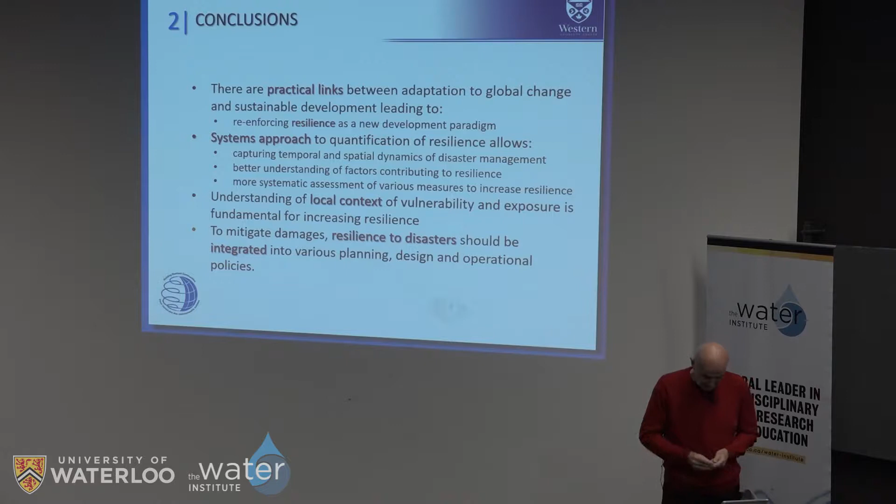I organized the presentation in the form of walking you from risk management to resilience, a little bit on quantification of the concept, and then through the example of a public tool that we have developed, I would present how this quantitative concept can be used in decision making.

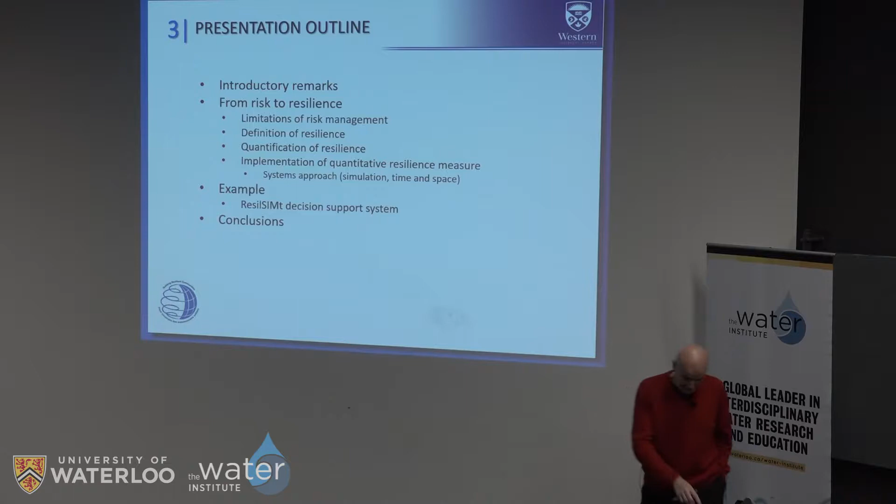I do have a lot to say about this particular tool and my multi-year attempt to involve the city of Toronto to work with us, and unfortunately, that's not an easy task.

To give you the context, these are the type of projects that I was involved with, within which we worked and utilized this or developed this quantification scheme, introduced this idea of resilience to various areas of potential application, and also worked with decision makers in developing tools that can be used by them.

I'm leading two projects, one a collaborative research project with BC Hydro, where this concept of resilience is being used to assess the safety of hydropower infrastructure, especially dams, and how this concept can help resolve the problem of having $63 billion in assets and approximately less than $10 billion over the next 10 years to maintain them, with assets about 50 to 60 years old. So you understand that the issues related to safety are very serious issues they have to deal with.

The second project I'm involved with is funded by the reinsurance company Chaucer. It's also a collaborative project, and they are very much interested in seeing how different types of natural disasters, with a focus on weather-caused disasters and earthquakes, can be incorporated into their business model, the way they offer products, how they structure the products, and how they determine what products should be done.

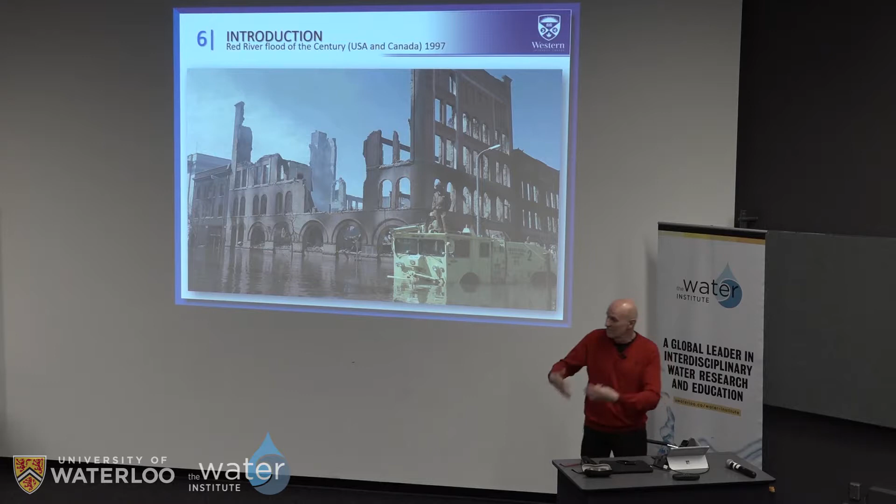For me, it was an illustration of how easy it is to teach students how to design a dike or how to operate a piece of flood protection infrastructure, but how to explain something like this, or how I felt when people were talking about losing everything, lifetime possessions in a single event that basically erased generations of family economic growth.

So that probably affected the rest of my professional life. I did a lot of work related to managing risk, dealing with issues and events like this very large flood in 1997. Risk management is already part of decision making, especially dealing with complex water resources problems like droughts or floods or response to extremes. But in this context, we relatively simplify the whole problem by looking at the hazard, the probability of hazard, coming up with the best way of estimating it, and then looking into consequences of various types, trying to combine them into some measure of risk.

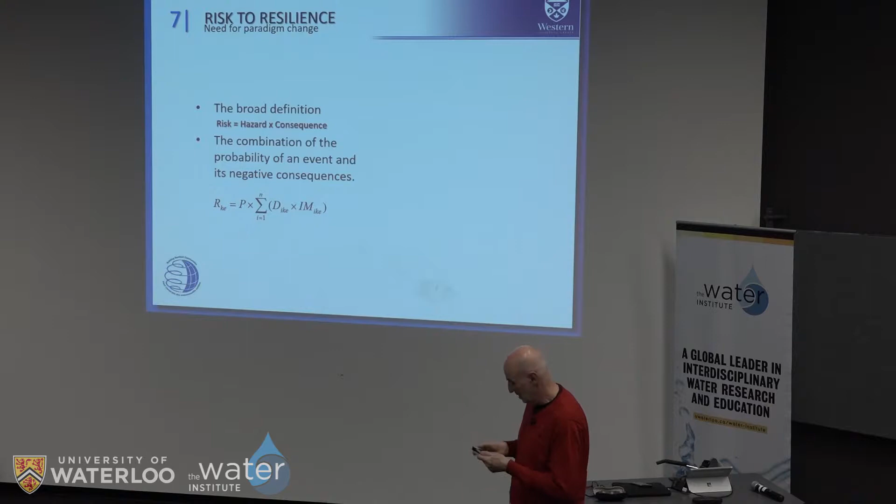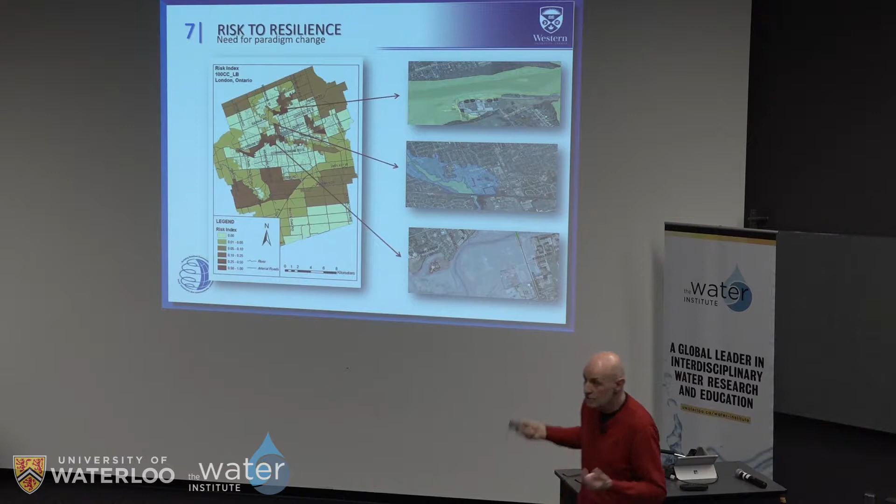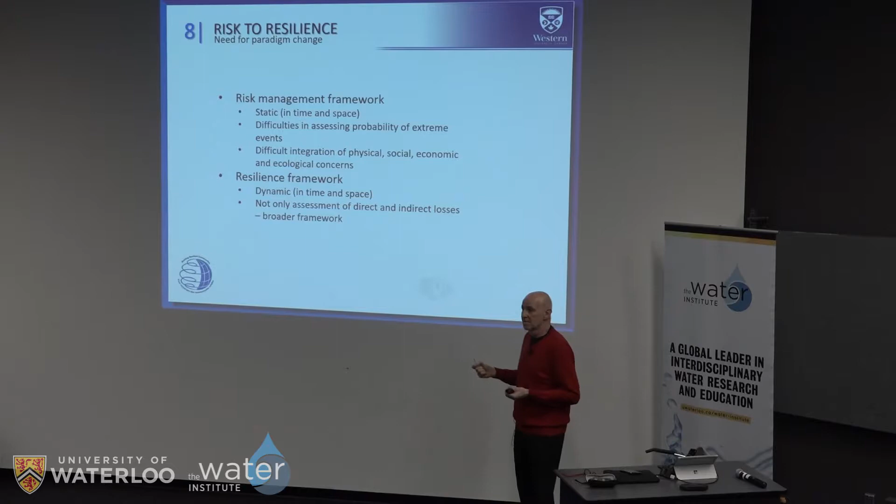So I'm trying to illustrate that even in this static form, a single number and a map with different shades of red, this kind of risk assessment tool was useful for decision makers. However, I feel there are still a lot of issues. First, this static nature and representation of risk as a single number. Also, difficulties in coming up with probabilities of extreme events when we are very much aware of how few observations of extreme events we actually have.

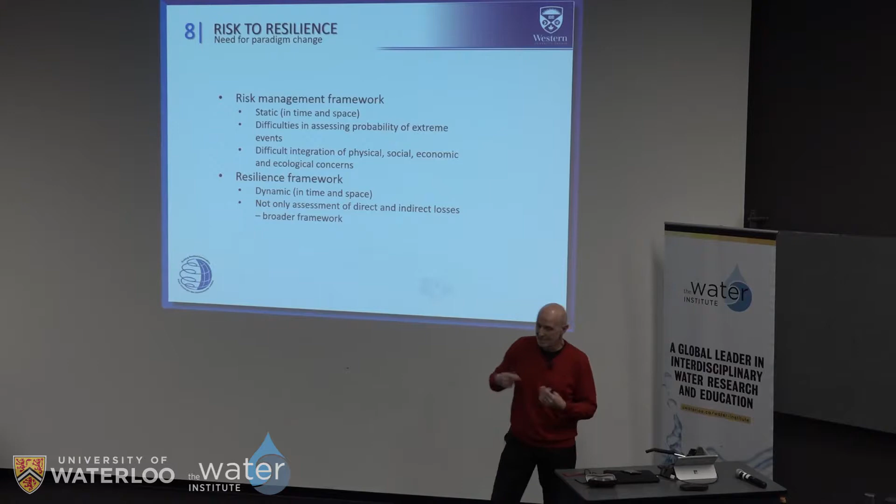Difficulties in integrating physical, social, economic, and ecological concerns together led to the whole switch, at least in my thinking and research, towards a measure of a different nature.

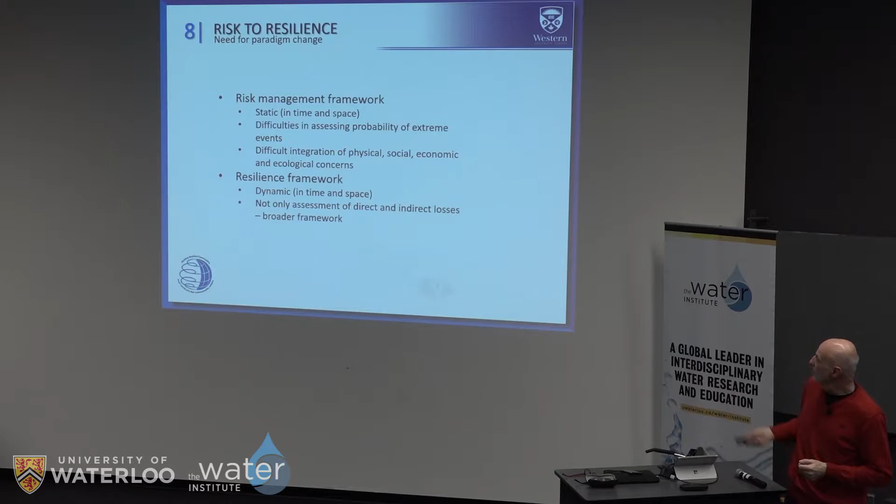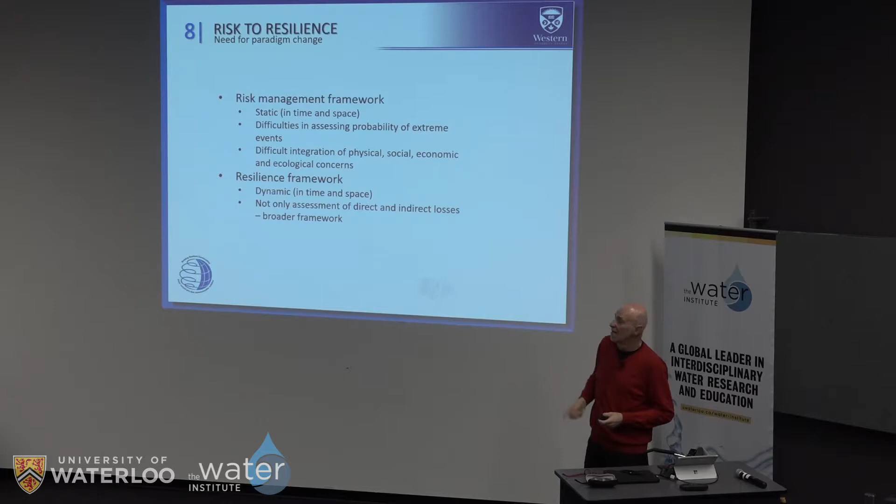That measure, at the beginning, needed to satisfy the need to be dynamic so we can capture the development and how the event goes from the beginning to the end and full recovery, and also the ability to deal with direct and indirect losses, basically building a broader framework that can be of multiple value to decision makers. So what we have done, we basically replaced the one shade of red in that previous map with a graph.

This graph is now a representation over time. The horizontal axis shows the time, and the vertical axis shows the impact, capturing the whole event.

Let's say we are measuring the number of kilometers of roads that are being inundated due to flooding within the urban environment. If this is the beginning of the flooding event, the roads will be inundated until we reach the maximum flow representing the maximum extent of damage, and after that, the system will slowly be recovering back.

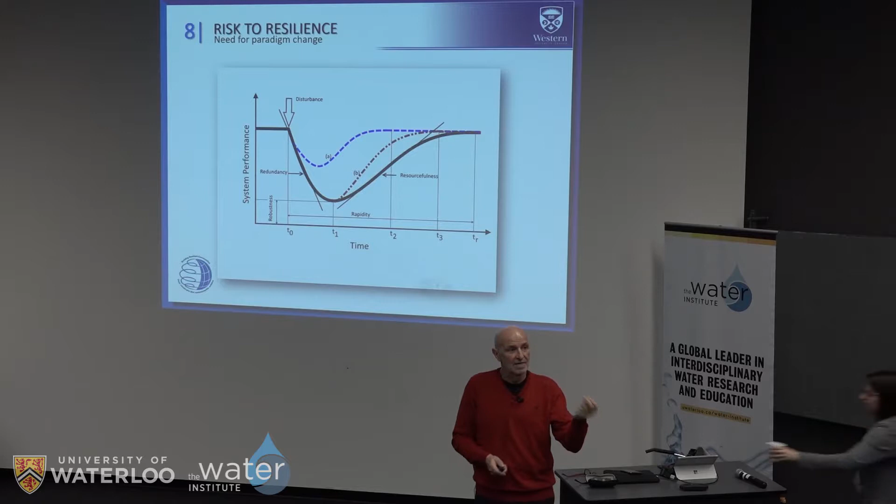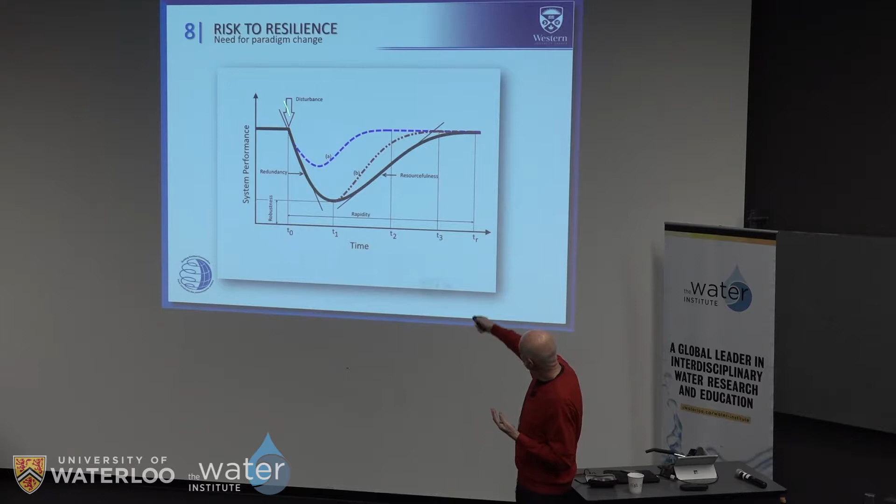So instead of having a single value of risk, now we have multiple sources of information. We are capturing the dynamics. We can see the slope of this curve, which is called the redundancy, that measures how fast you are losing the performance, how fast the roads are becoming

impassable or flooded. We have a measure of what is the maximum extent of that particular impact. We have a measure of how much time it will take for the system to recover. We also have the opportunity to see whether the system will be able to come back, or maybe simply end up with a level of performance below the initial performance.

Or if we put some resources, financial, human, mechanization, whatever, into this particular part of the event, we can actually change the slope, and we can maybe build the capacity of the system to a higher level than before.

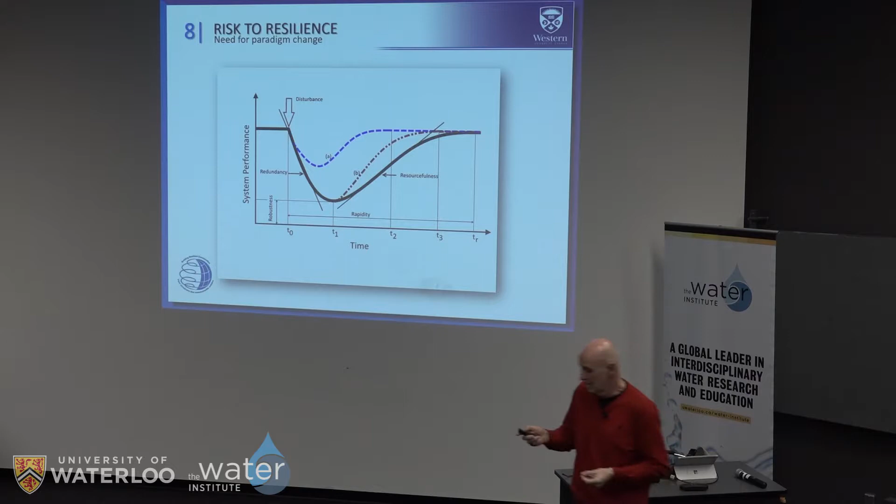So you see, we are replacing a single value, a single kind of risk, with now a full description of the system's response to change or changing conditions. And that's exactly what was used in the quantification.

I'm not going to go through the definitions. The origins of the terms are relatively old. Mechanical engineers are fully aware of, and civil engineers too, from mechanics, the work of Rankin. And then we had people in the ecological domain, followed by the hazard domain, where resilience started becoming a more and more popular term.

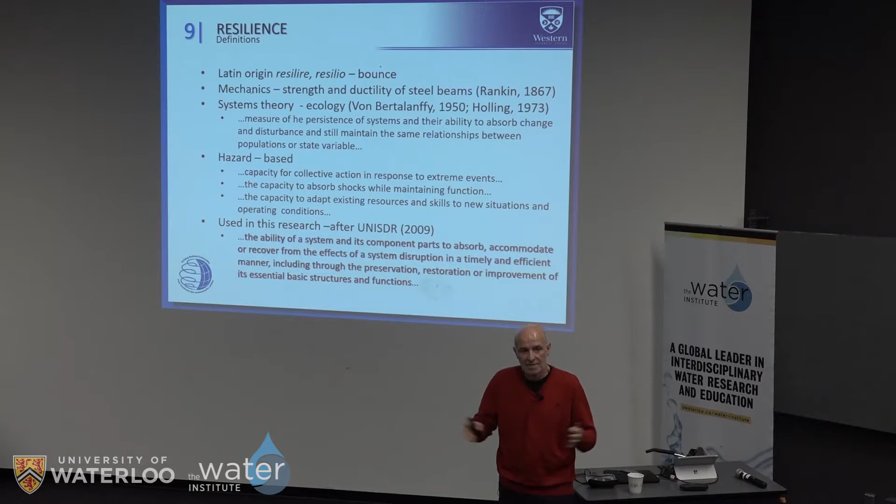At the end, what I'm using in this definition, and I think you're probably already sensing from the previous graph, I'm defining or expanding the definition of the United Nations disaster reduction, seeing resilience as the ability of the system to respond to change or changing conditions by mobilizing resources within a particular time frame and trying to return the functioning of the system back to its initial stage.

That type of definition and the graph I showed can be developed for multiple impacts. I gave the example of roads being inundated. We may show the performance curve using as a measure the number of beds in hospitals for people who may be injured during the disaster.

We may be using the number of, or the time of, disturbance to the information network or the communication network. So you can develop various impacts, link them to a particular hazard under consideration, all of them having different units and a similar shape of performance graph.

So now the logical question is, how can we convert that into a single measure? How can we put these different units together? The idea is relatively simple, and that's the idea we implemented in quantifying this.

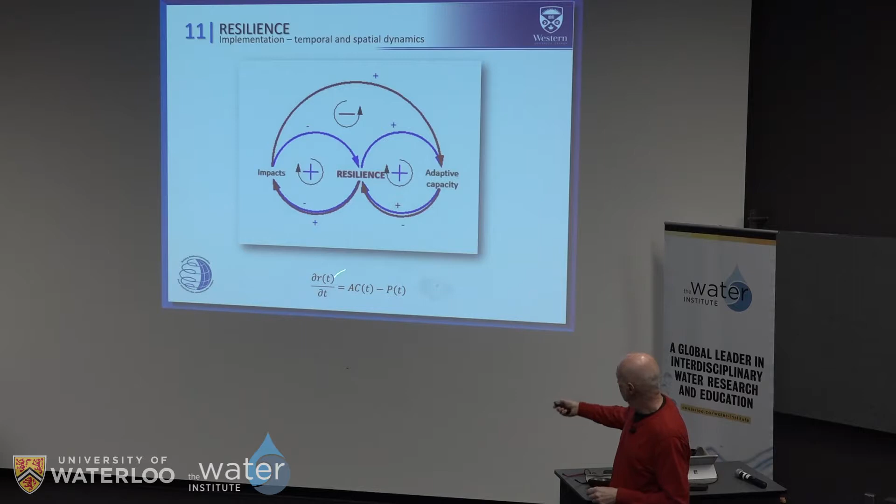That's implemented now in a systems simulation context with 3 feedback relationships linking impacts, resilience, and adaptive capacity, where 2 of them are destabilizing the system. These are the blue feedbacks, and the big red one is actually trying to push the system to a more stable state. In analytical form, adaptive capacity and the impacts together give us that measure of resilience.

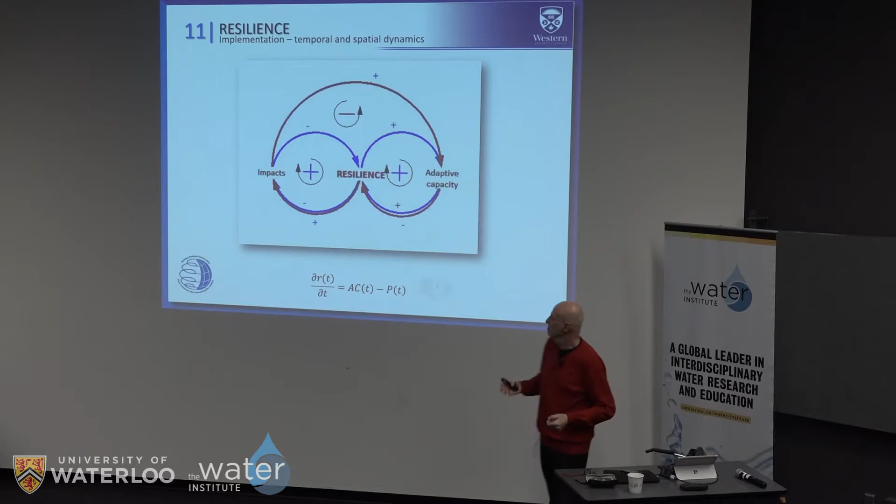So that's a short walk through the quantification process that allowed us to think about how to use this concept. We started very early with this project on coastal megacities, where each city was considered to be the system under consideration.

4 impacts were put together: physical, social, health, and environmental. We had a very interdisciplinary team. We worked with 2 doctors looking into health impact, 4 social scientists, 2 political scientists. I was even co-advising a thesis in political science, being an engineer.

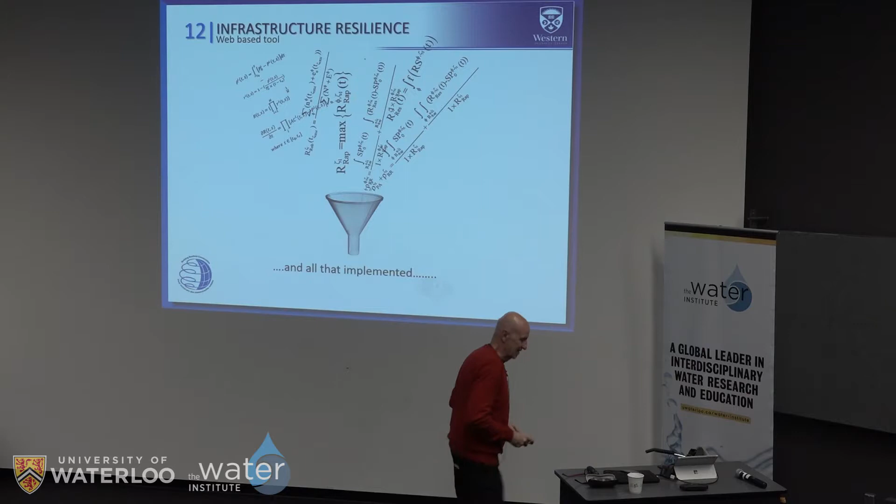That was really a challenge. But the point was that this concept did help us put these different perspectives together. It took us about a year to develop the understanding and vocabulary and agree, because economists were talking about the same things as we engineers but using completely different language. Our colleagues in social science were also talking about similar things but using another way of expressing their concerns. That prompted further motivation to try and build something that will help those who may want to implement this.

So the implementation that I'm covering in this presentation is available in the public domain in 2 forms. Here are the websites you can access easily to see what we have developed.

The first one is a prototype system that only deals with flood disasters, with 2 options, looking at Toronto and London, Ontario, and also seeing how, for example, different adaptation options can be investigated to respond to flooding in these 2 cities, utilizing this measure of resilience.

The second one I'm going to walk you through is much more detailed and much more general. We accepted the same idea of resilience, implemented in such a form that the user can identify the hazard, so it can go outside the domain of weather-caused hazards.

You can consider a terrorist attack. You can consider chemical spills. You can consider any possible hazard that may occur, and the same idea, in the same context and the same concept of resilience, can be used to investigate various response actions and adaptation measures.

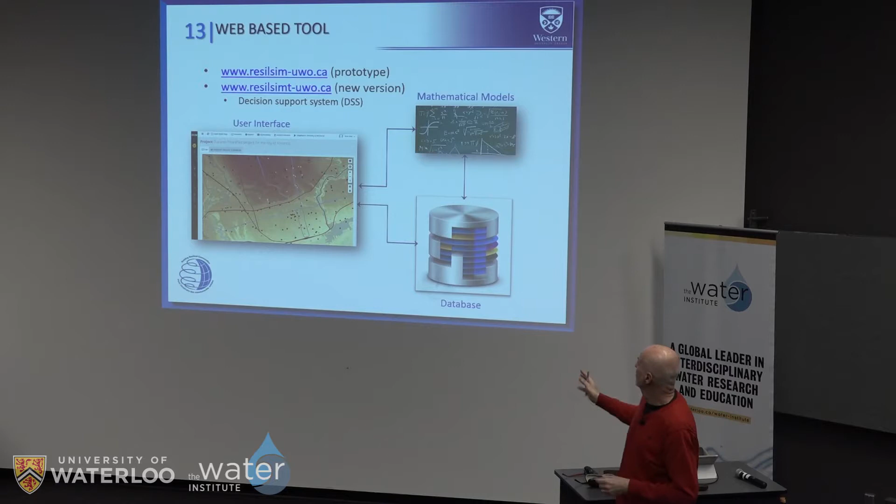Both systems are developed in the form of a decision support system, combining 3 key groups of tools: the graphical user interface, to assist users in preparing information, processing it, generating outputs, and extracting outputs in a form useful to them; a database, which is permanently updated with available information; and the so-called model base, where all the necessary calculations are stored, like the calculation of resilience as I presented it, as well as various impacts being considered.

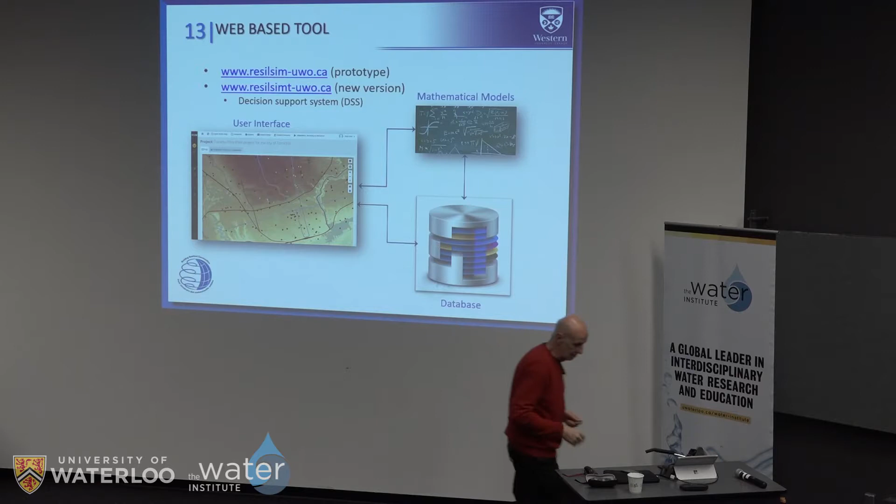This is the view—I'm just going to walk you through a few of the screens. A presentation of this nature doesn't allow me to go into a full demonstration, but I would strongly encourage you, if you have interest, to actually access this particular more detailed tool. Both tools have user manuals, also downloadable.

In this particular case, there are 5 examples already provided on the web, nicely illustrating various ways of using this tool. And the user manual describes all these 5 examples, so you can nicely go through them if you're interested.

So the key starting point through the graphical user interface is to build your system. Building the structure of the system is, in our case, restricted to 2 different formats. One is networks, which applies to roads, electrical supply, water supply, information, and so on.

And another, we call them kind of layers, basically spatial representation of the information. And I thought these two formats are sufficient basically to cover everything that may be of interest.

Relatively recently I had a presentation where colleagues from wind engineering were in the room, and they asked me, is this network and spatial format sufficient to represent all the details of the system? They were looking for a third dimension, actually the height of the building, because that generates exposure to wind and is the main source of that effect. So obviously there is space for improvement and expansion. We do not have that right now in the system.

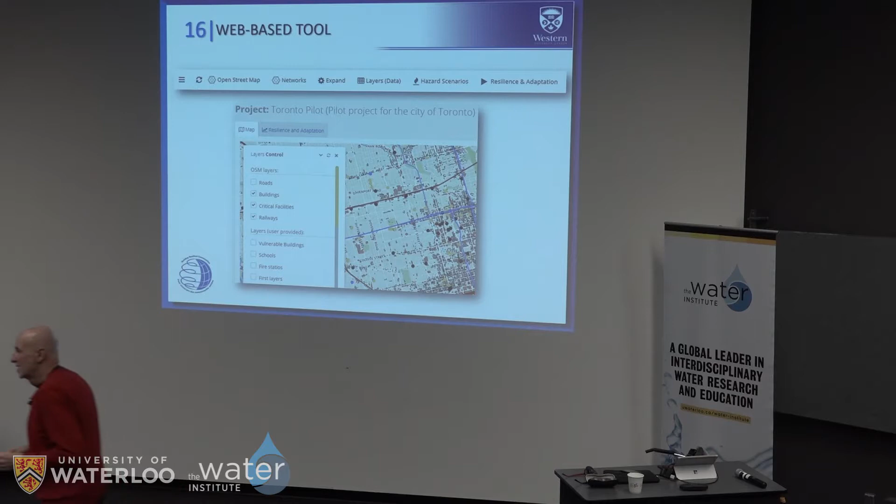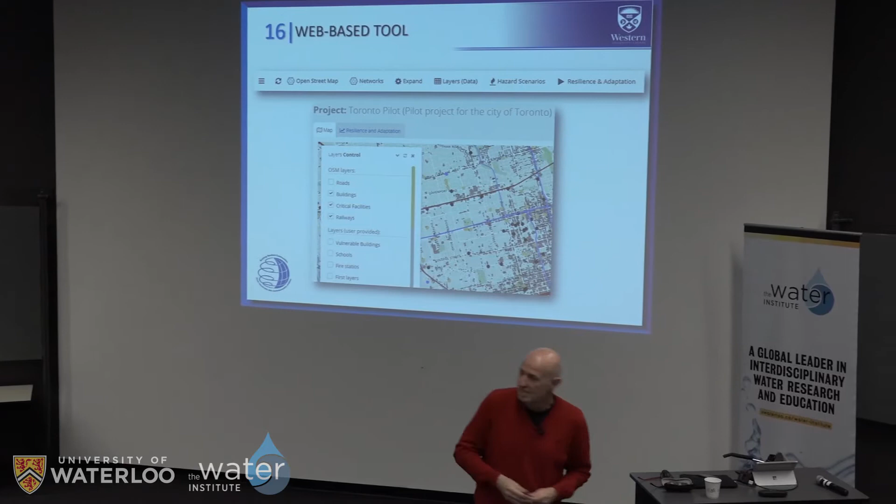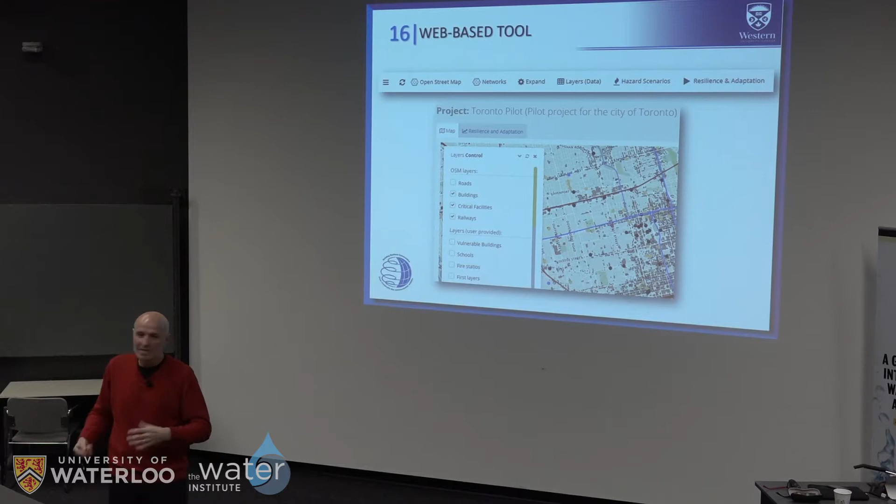I should probably tell you a little bit about this. I made the presentation of the idea to the city of Toronto seven times, talking to different groups. I know that the city of Toronto is one of the 100 resilient cities according to the Rockefeller Foundation. They appointed a resilience officer, and I was hoping to have a chance to talk to them, but that was not possible. After about seven presentations over a year or so, we were not even able to get the digital elevation model from the city, because it required five levels of approval to be shared with someone outside of the city. Very, very strange, at least for my understanding of how municipal government functions.

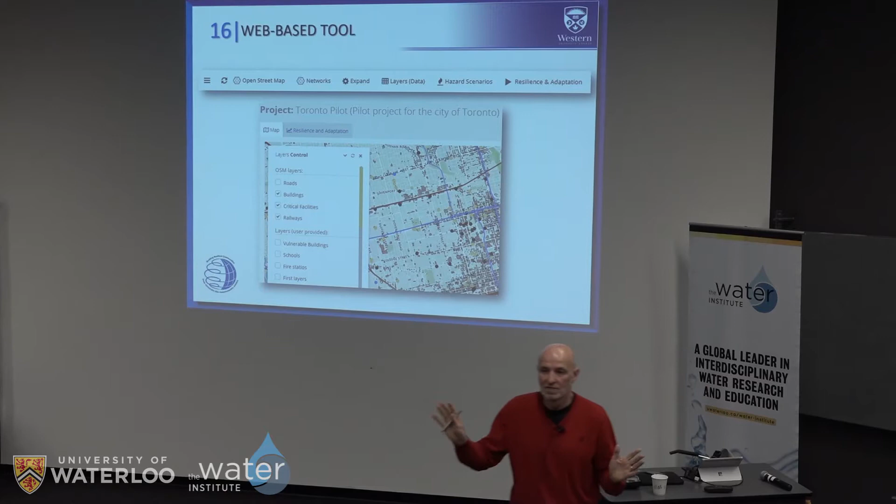But anyhow, we decided to forget that part of the project and move on. What we did was enter into what's known as public information of this nature. This kind of information is widely available, and we used it to populate our database, so everything is based on public information. That allowed us to complete the project and have a functioning system that can, if one day the city decides to go that direction, be modified or improved by populating it with their own data.

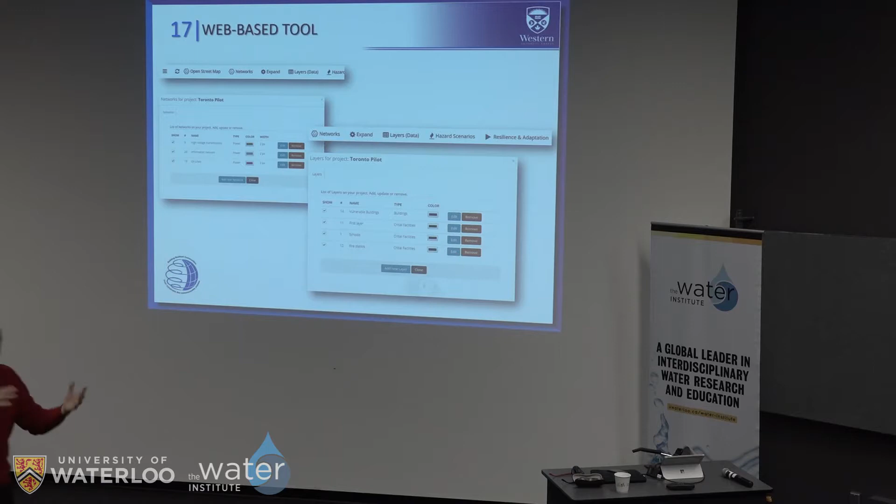So the first step in the process is definition of the system. Through a set of screens like this, you enter the information about your system. As you can see, on the left-hand side are networks, and you can edit, remove, or add all the kinds of networks that are part of your system or of concern.

The second type of input is related to the spatial information that we call layers, again with a very flexible format that can take any type of information that's important, such as vulnerable buildings, fire stations, schools, information networks, high voltage transmission lines, oil supply lines, and so on.

So basically, we've prepared ways that information can be imported in a particular format explained from other sources, or directly entered into the system. When you click the edit button, additional screens come up that allow you to enter the information in a very detailed form.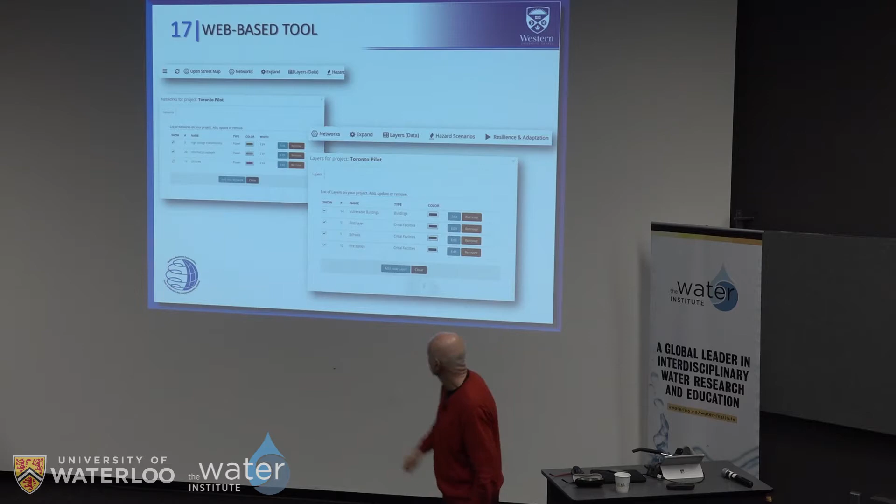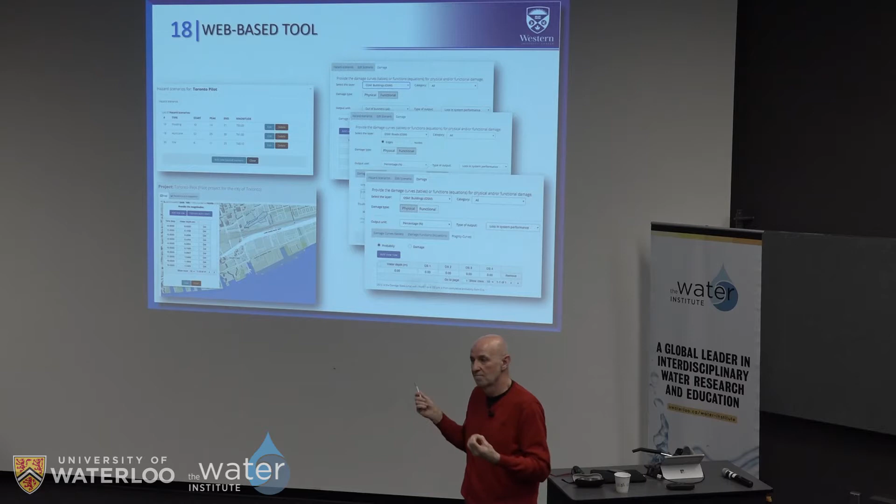Once the system is set up and this information is in the database, we proceed with identification of the hazard. That's a new part in this particular version of the tool, and the reason we built this as user-provided input is to allow the system to really consider various hazards. So there is no particular limitation on what type of hazard you may be using the system for.

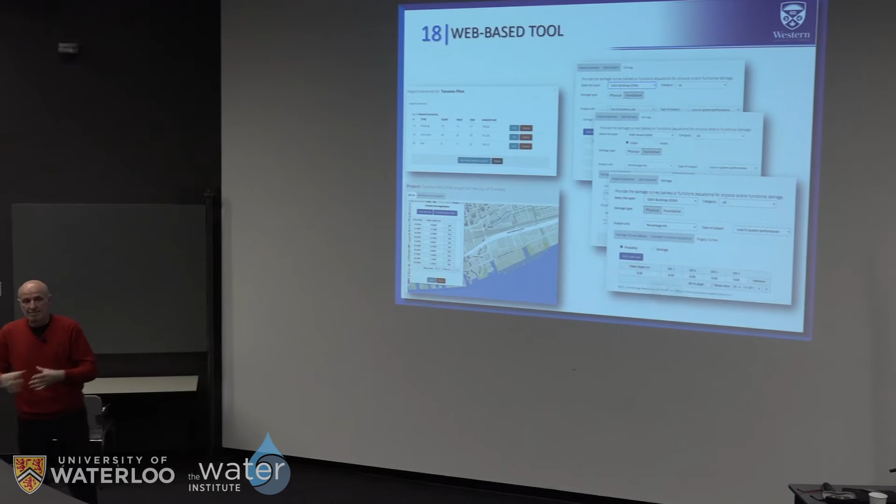There are a couple of very interesting options. One is to identify the hazard by simply plotting the affected area on the map. So if someone drops a bomb somewhere, the affected area can be immediately mapped and identified. If you have a rainfall event hitting the southern part of the city, you can very easily enter that information. So one form is this graphical form.

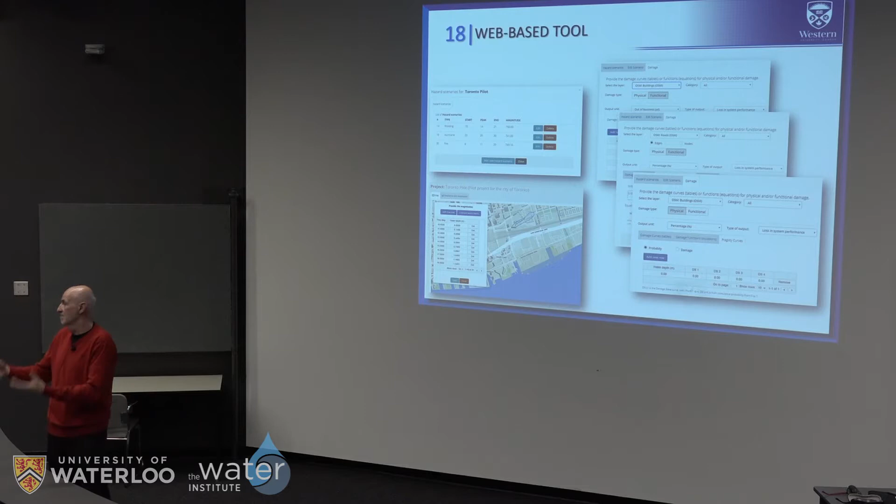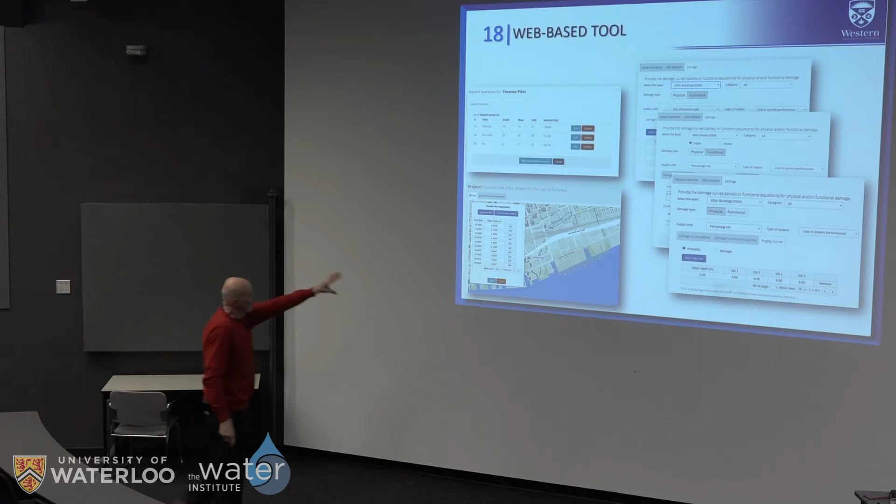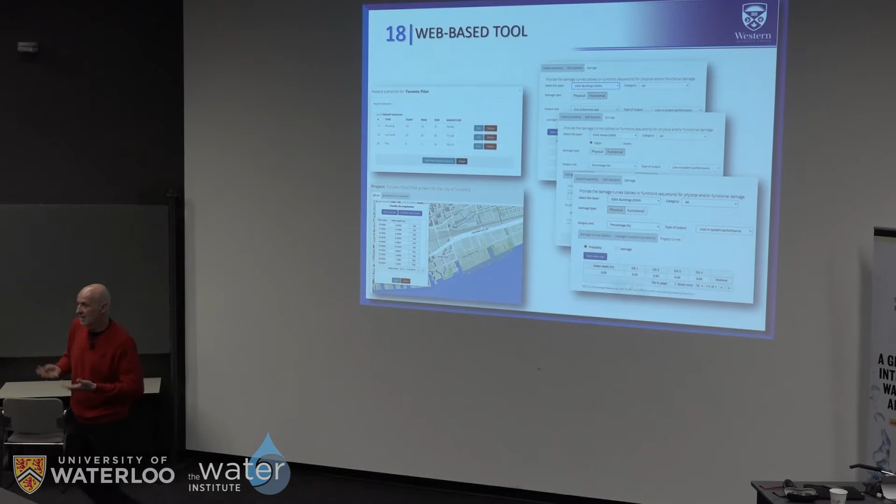Another option, if this is used for planning purposes or something similar, is that you may have historical data or historical events that you can import as hazardous events into the tool to do the analysis. For each of these events, there is a number of additional pieces of information required, which are basically ways of characterizing or describing the hazard.

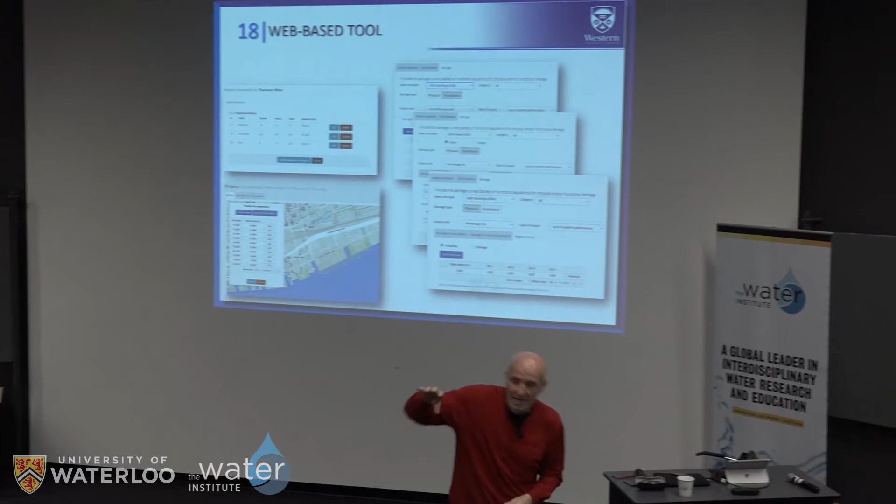In this particular case, this was a small precipitation event that happened in August when we were finishing the system, and we captured the water depth that was occurring over the duration of the event. On the other side, you had a number of different ways to enter the potential impacts of the hazard. If the hazard generates physical damage, you describe that type of physical damage and provide the information for assessing it.

The information can be provided in a purely economic form, like depth-damage relationships in the case of flooding, or fragility curves in the case of wind disasters, which are more or less probabilistic expressions. You can provide both physical and functional impact. Anything that particular hazard may generate on the system you already provided to the tool needs to go into the system through communication with this interface.

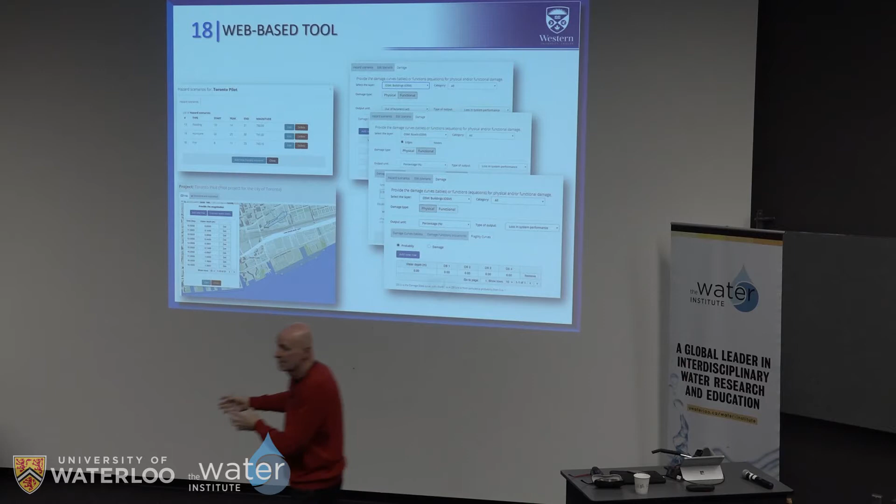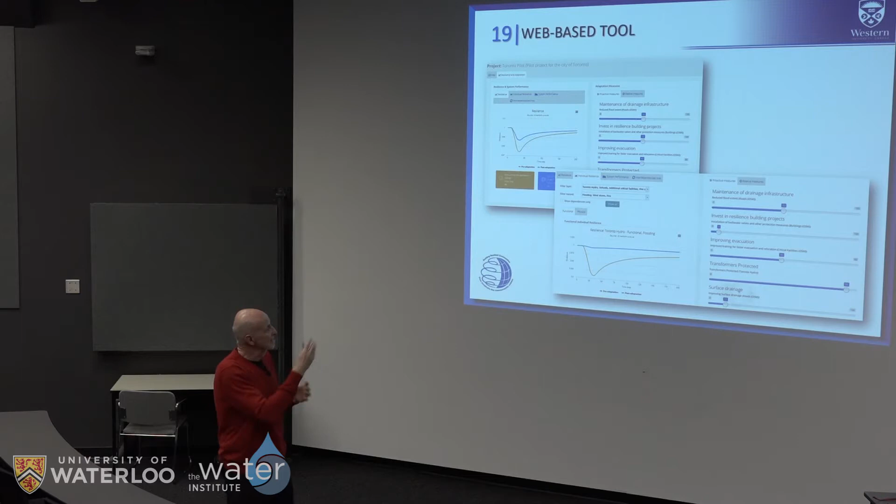Now we have a system defined, we have a hazard defined, and we are coming to the most interesting part, where again a portion of it can be designed by the user. That's the part where we are utilizing this resilience concept by creating the set of measures to respond to the hazard under consideration.

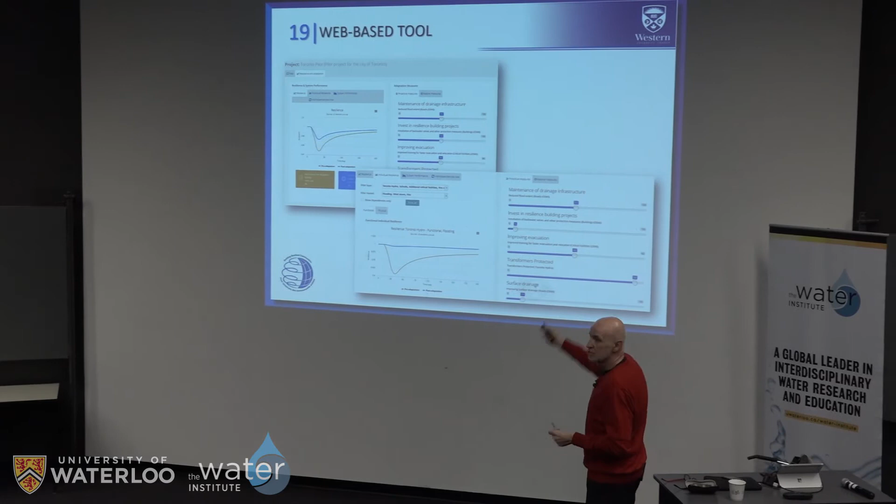So the right-hand side of this screen is basically the user's choice of various measures, how you are responding or want to respond to different hazards. We were talking about, let's say, investment in the maintenance of the drainage network, or a number of transformers being protected by higher elevation.

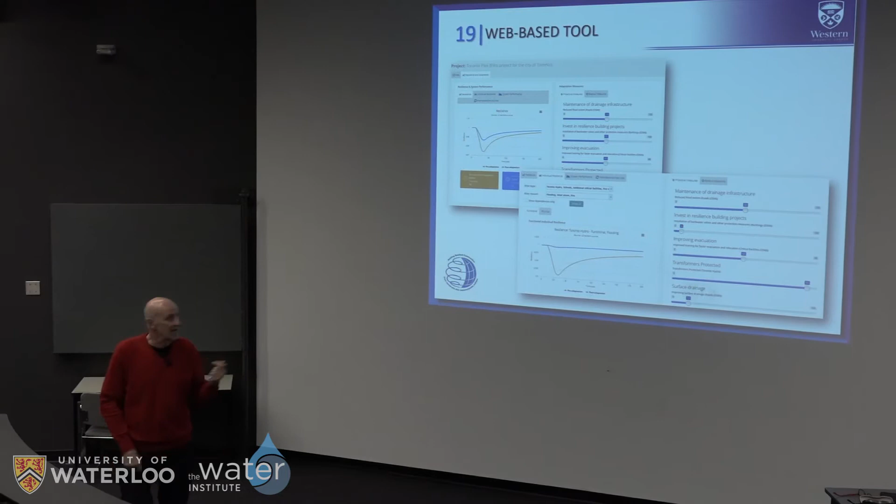When we were working with the insurance guys, they wanted us to put, for example, the time required to process the claims. So various ways how you respond can be directly put as different types of adaptation options, and that immediately gives you the opportunity to calculate resilience and see how these different options compare.

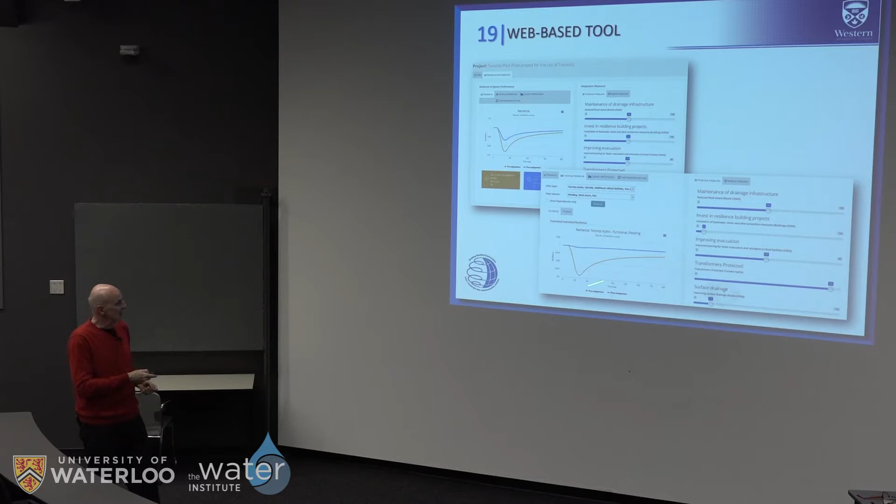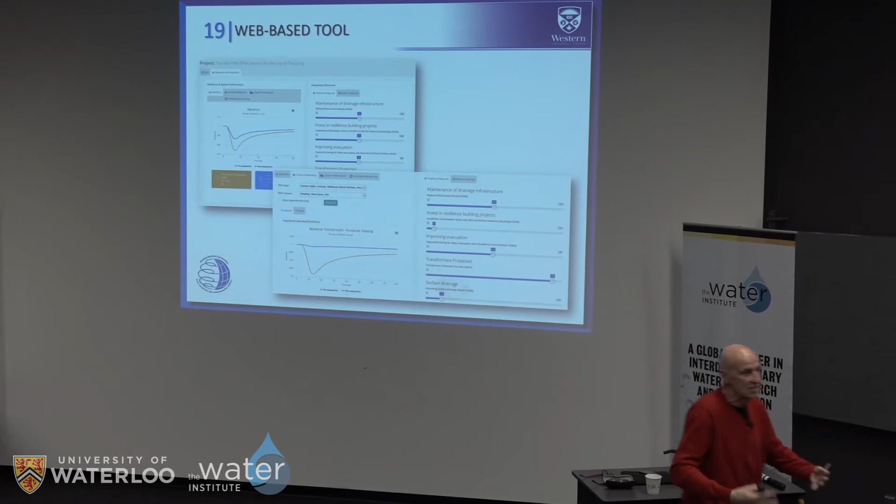So what you see on the left-hand side are now the outputs of the analysis. The yellow line represents the resilience of the system without any adaptation options, subject to the particular hazard, which is the current state of the system without any addition. The blue lines represent the outcomes with the selected choices of potential adaptation options.

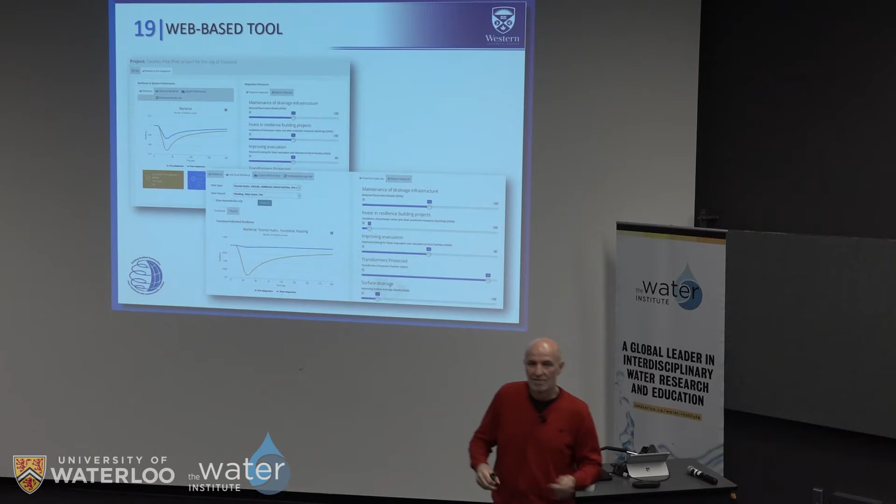You can see this is all happening in real time. If you go into the system, you just click and you get the lines being plotted. The information on the slope, on the redundancy, and the timing is also provided. The resilience of particular elements of interest or particular impacts is provided, as well as the total resilience. So you have various options of creating outputs that can help decision makers.

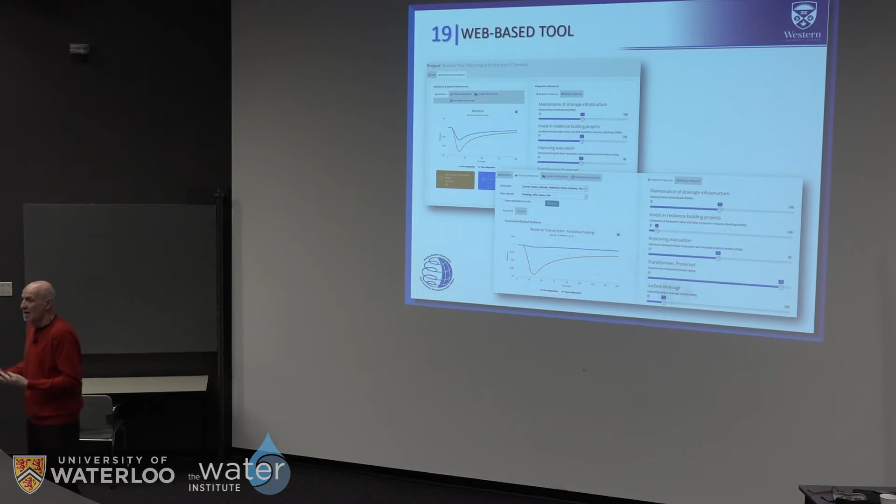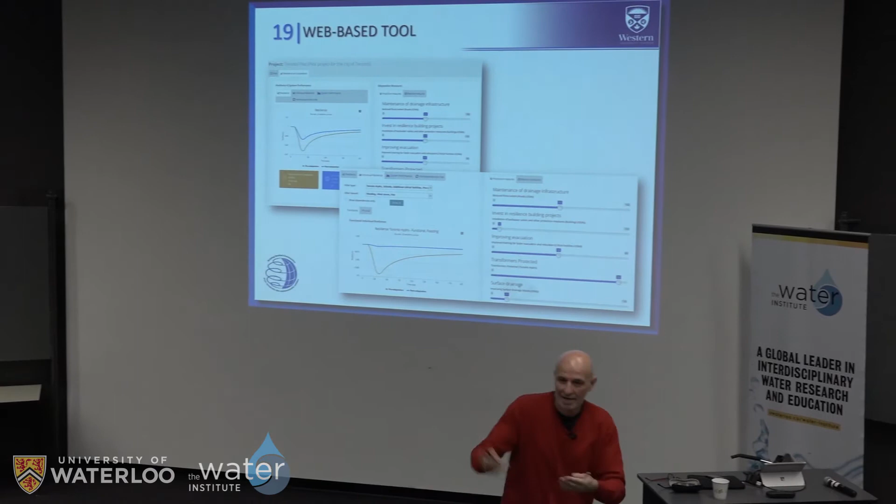So my view of this for the city of Toronto would be that you have the system implemented, and then on your tablet and phone, those who are responsible can immediately respond to an event, go out, capture the extent of the impact, enter this information, and almost in real time make decisions. Should we bring more pumps, or should we mobilize more people, or should we do something else to respond to the situation?

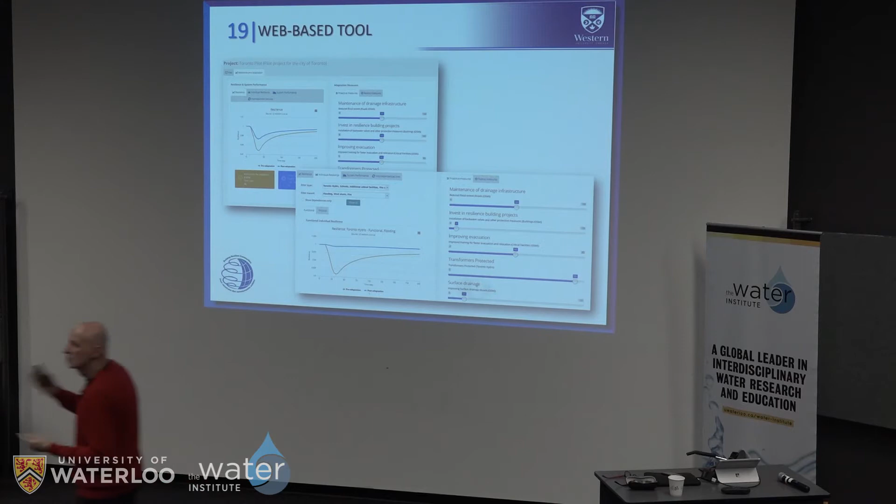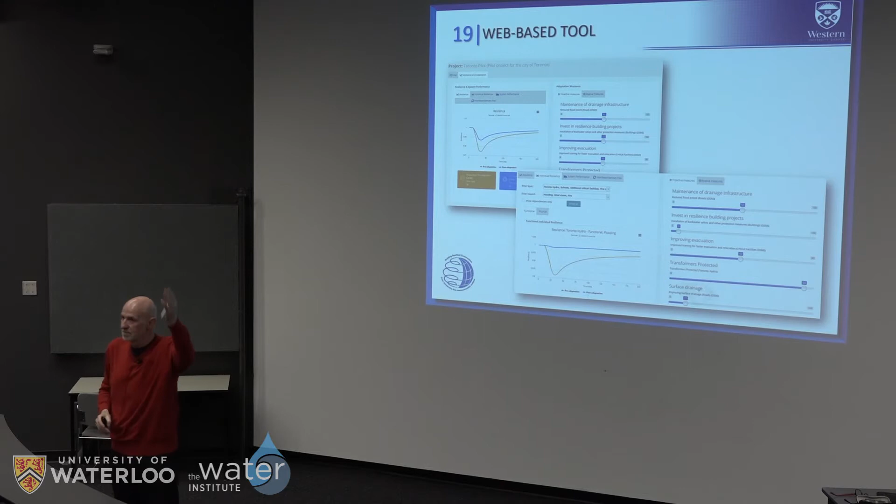Or in the case of planning and sitting in the office, you decide, for example, you have this budget for dealing with the hazards. How should we invest? Should we put that into the early stages of reducing the slope of the loss, or should we put all the money into the response and trying to bring the system back as fast as possible? So very easily you can experiment with these various options.

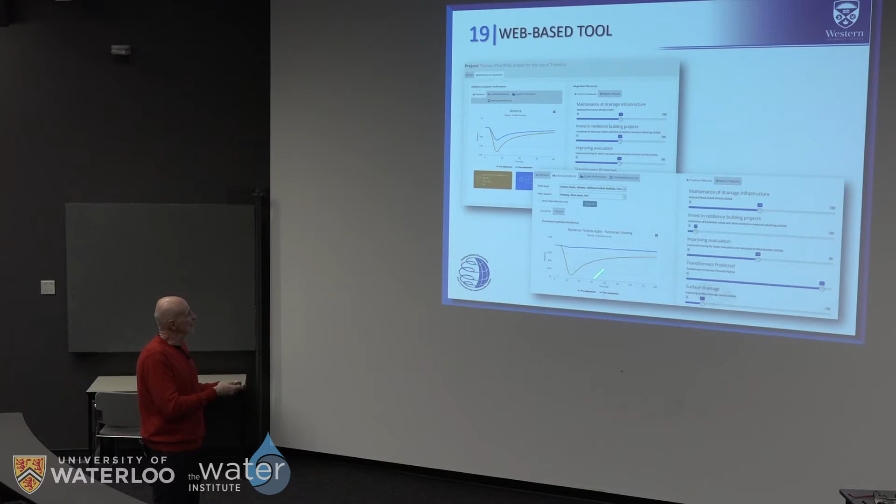First, you can choose various options. You can bring different perspectives into that kind of response, and then integrate them together and basically use the resilience as the measure that can help the final decision. I'm not saying this should be the single criteria for decision makers, but it can be very nicely integrated with other points of view.

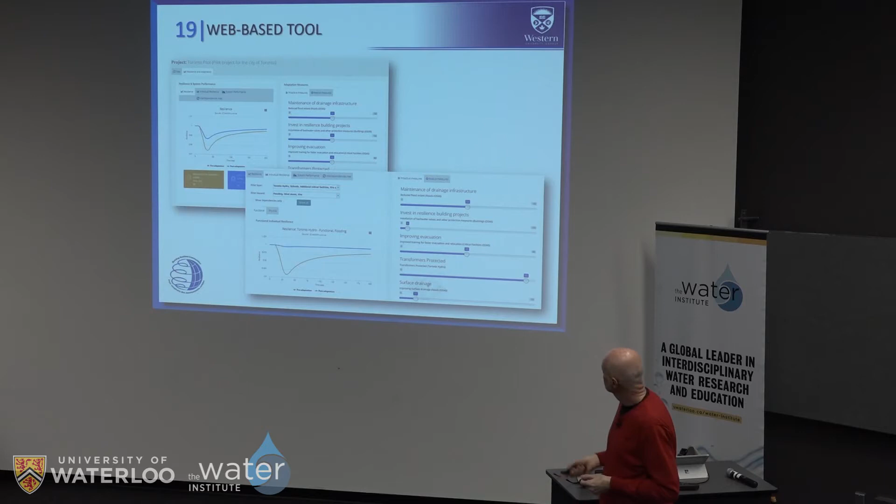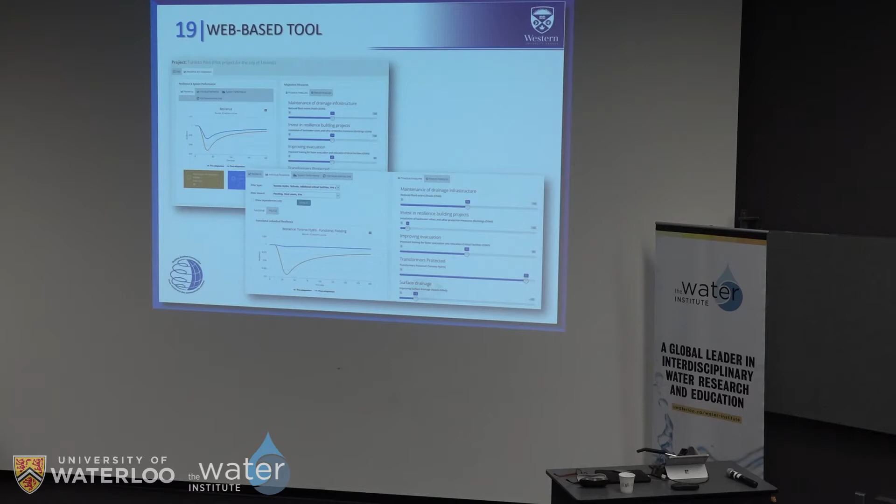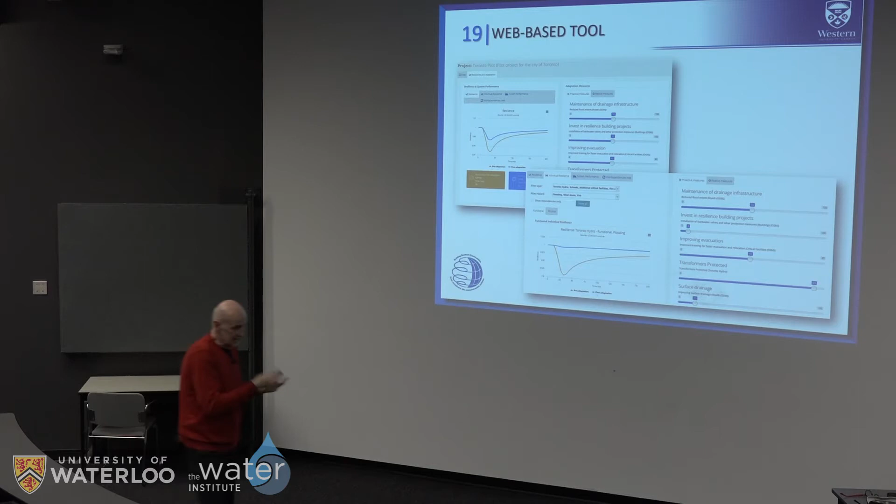You can easily bring the economics, costs, and potential limitations of the budgets into this type of analysis, and then see how that may be interacting and affecting the resilience. You can deal with various options, like deciding if you have multiple impacts—health impacts, social impacts, some environmental impacts—what are the trade-offs? If we respond in this way, how will resilience be for that part of the system? So you can do multiple kinds of analysis with the same framework as it is built, if you accept that kind of quantification and definition of resilience as I presented earlier.

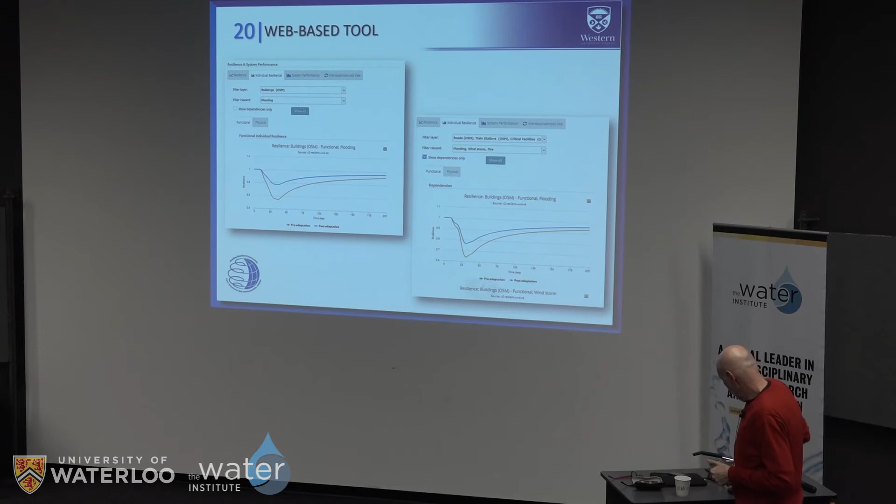So this brings me to the end of the presentation. I was trying here to illustrate that there are some kind of links between adaptation to globally changing conditions and sustainable development. In my opinion, this is a very serious call for looking into resilience as a development paradigm. I have a strong bias that systems analysis, assessing all these impacts, requires models.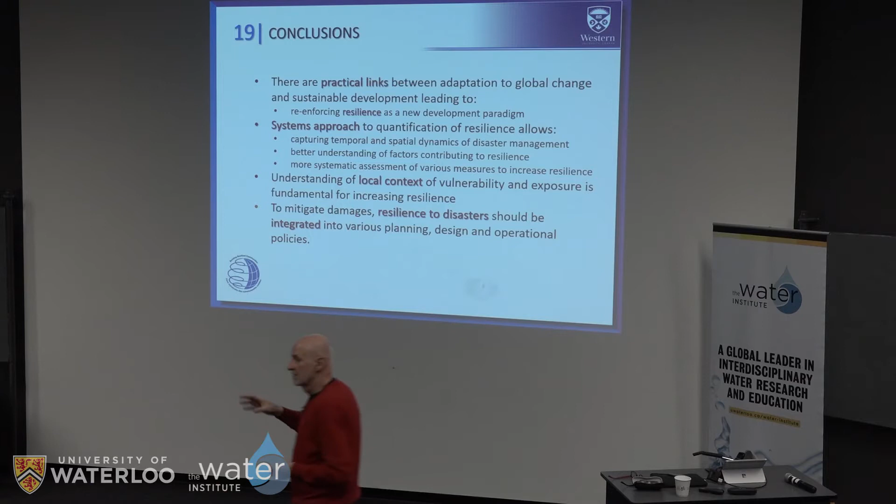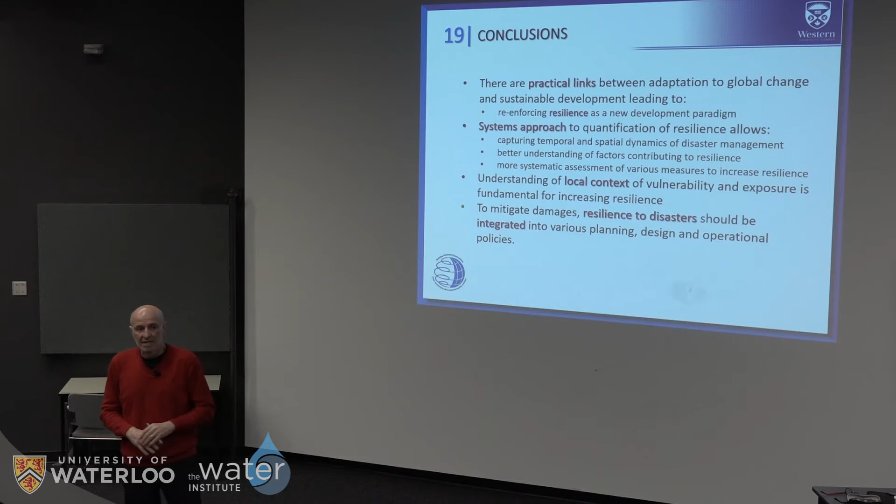These models can be simulation type models, which basically help you calculate the impacts. So the systems approach, systems thinking, is definitely present from the beginning, from the point of view of designing your system, identifying how far you're going to go with the network, how many different networks you're going to consider, and so on.

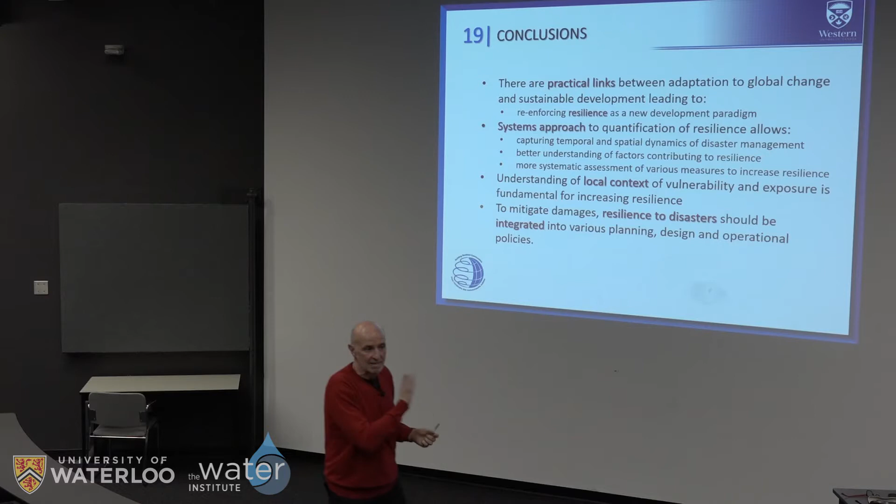That helps us understand the temporal and spatial dynamics of resilience, the contributions to resilience, and what are the important factors contributing. I think at the end it offers an opportunity to serve as a tool for decision making. In order to do that, you have to take care of the local context, and I think the example I presented nicely illustrates the importance of local context.

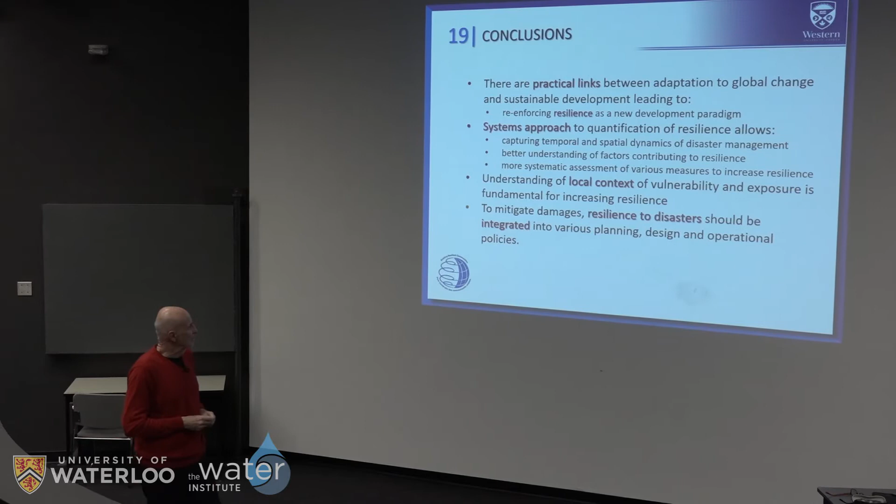You have to use, for example, the city of Toronto, then we build the networks and utilize the information for the city, and that allows you to go with hazards and so on. I feel very strongly that the tool and approach can serve a variety of decision-making questions, from planning, designing, operating complex infrastructure systems, and also the ability to integrate various aspects together.

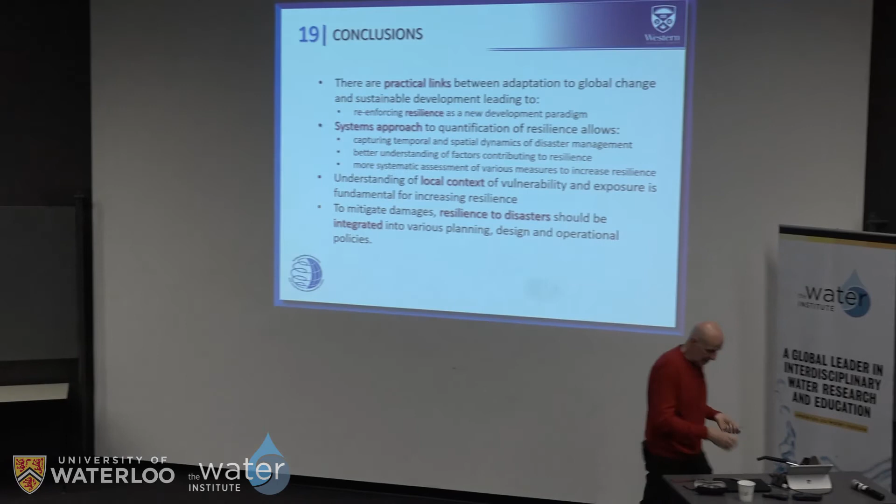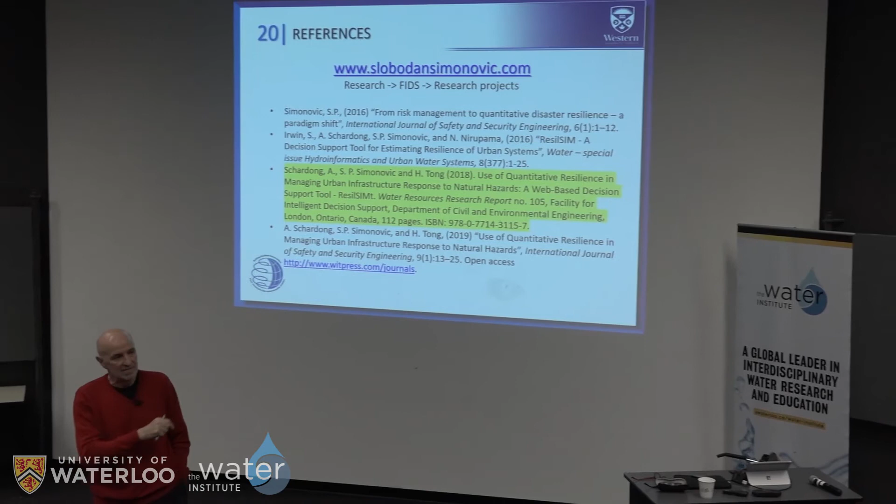These are some of the publications talking about the quantification that are already available. In yellow is what my lab is publishing as blue books, called Water Resources Research Reports. They're available through our library, my personal website, or the website of the laboratory. These blue books are very detailed. The yellow one, for example, is basically a manual for the system I walked you through.

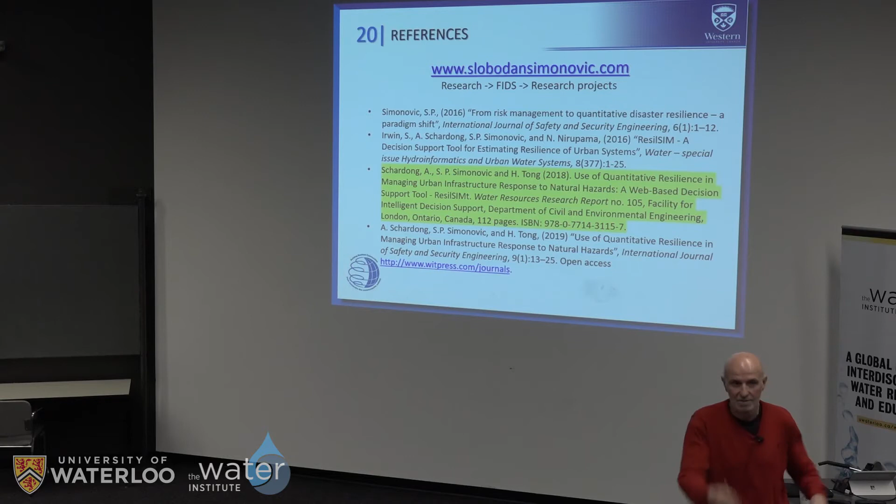In case you're interested in more details, I'm very much open and can respond to emails, simonovic@uwo.ca. A lot of information is also available on my website as well as the website of my laboratory. FIDS is the Facility for Intelligent Decision Support, the computer lab where my graduate students are working.

With this, thank you very much for the attention. I'll be happy, if we have time, to answer some questions.

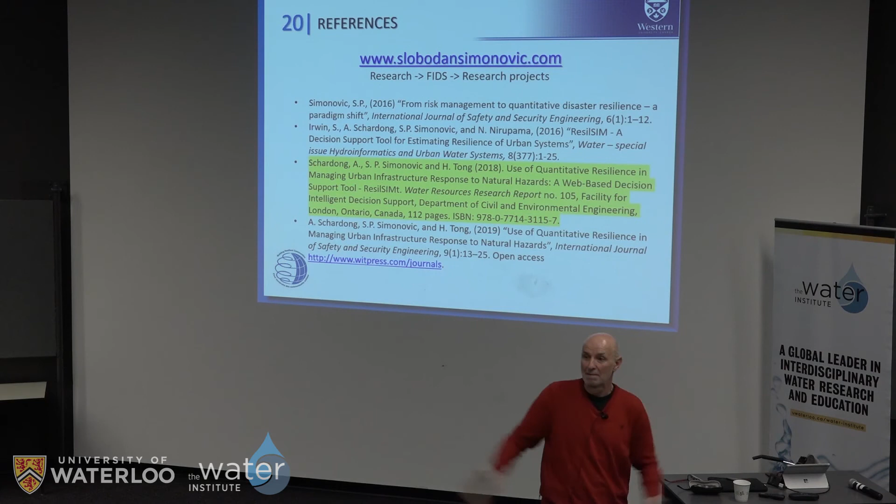So yes, the answer is yes, that curve may have a single drop to zero, you lose the performance completely. That's basically what happens with a disaster that completely destroys the system. A city is a little bit more complex, a system of multiple subsystems working together. In our simulations we were only focusing on different types of hazards, we simulated wind, basically Hurricane Hazel from 1954, wind and water, and we simulated earthquakes and water. But they were only focusing on particular parts of the city, nothing that would completely wipe out Toronto. But theoretically, there is no limitation.

Yes, thank you very much, it was a very great talk. Thank you. I actually had a question about the economics behind this, because you pointed out that it's possible to add dollar value to the effect of one particular option to increase the resilience, right? Is there the possibility of putting a dollar value to the loss of performance too?

Of course. My understanding is that resilience has to happen, but at what cost, right? If you have a nuclear plant or wastewater treatment plant, we have to save it from inundation at any cost. But if there's some recreational activity within riverbanks, then we can weigh that differently. So where and when do policymakers incorporate the dollar value? At two places: first, in definition of the hazard, where you can actually show and represent the impact of the hazard in economic terms.

So this is, for example, in flooding—that's relatively common—the stage damage, water depth damage curve. So with the water at this depth, you lose so much of the property value and so on. In defining that hazard, as I showed in some screens, this is where you can put the dollar value versus the impact of hazard.

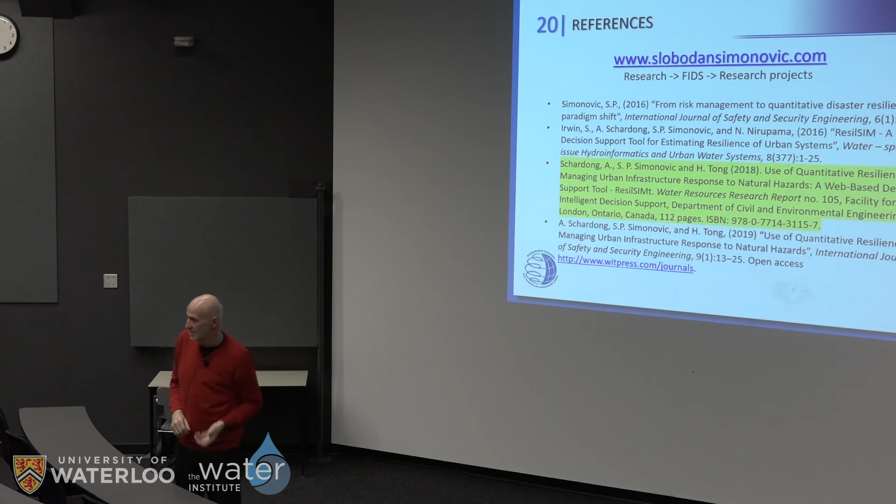And the cost and the response come in at the end, where the adaptation options are defined. One adaptation option could be investment into pre-disaster activities, or in response planning, increasing or decreasing budget. So you have the ability through this kind of resilience framework to balance the economic losses versus the costs of the system. This is also very useful because we can show the resilience corresponding to just one of these adaptation measures.

Then you can compare to others—like if you're considering the social and health impact, and you can also see the material or economic damage. So you can do some balancing, or integrate everything together into a single measure. That's already part of the system.

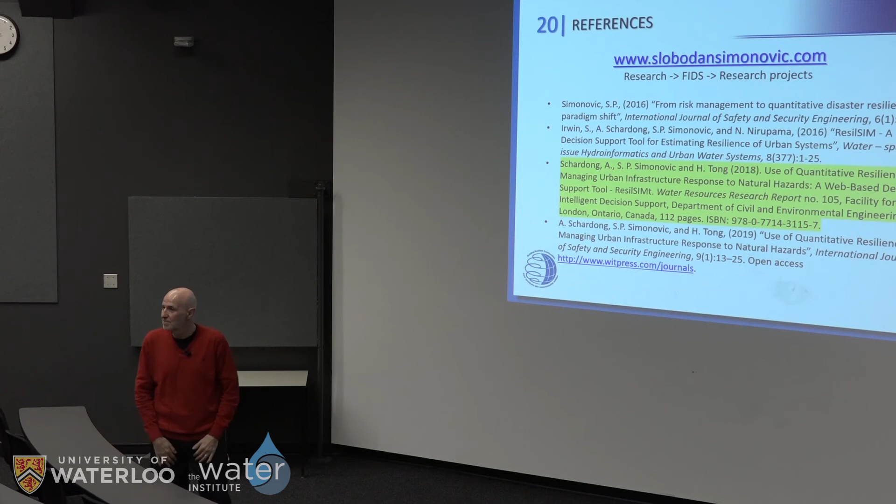Any other questions? I think that's it.

Sorry, I was just curious—with the flooding that happened in Toronto last summer or the year before, did you get any leeway with the City of Toronto by showing them how your model matched what actually happened on the ground?

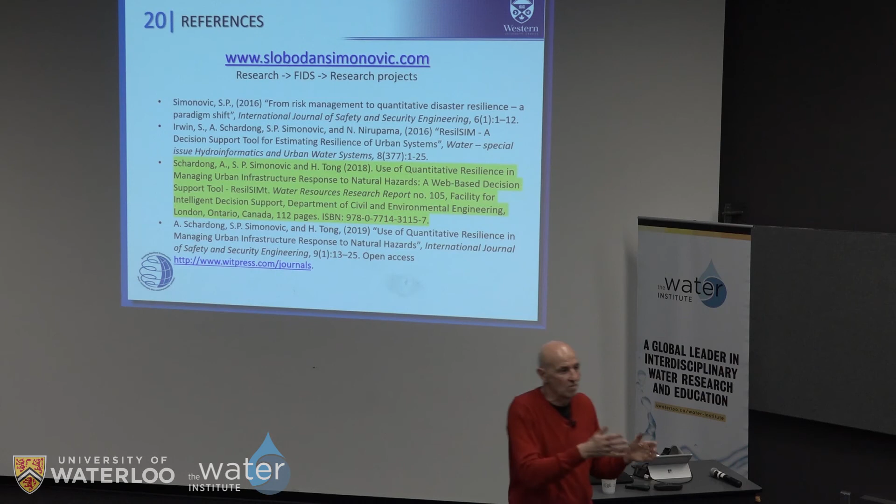We can very easily compare the description of the hazard and the extent of the impact, but there is no information on the response—how it's organized, who is making decisions, like what we have on the right-hand side, the options. No one is able to actually give you that.

In our case, especially with flooding, I can talk about that forever. We have a very responsive type of approach—you experience the damage in Toronto, basement flooding and so on, then you submit claims, the insurance covers part of it, responds to claims, and the rest possibly comes with input from the provincial or federal government depending on the extent of it. This insurance information—we worked very closely because I'm associated with an institute that's supported by the insurance industry.

We do have some data from them, but this is very highly protected information. And the city, as I told you, was not even ready to share the elevation of the ground in the city.

They were—we actually have some real TRCA data, especially on inundation maps. They provided for all 7 watersheds in Toronto the 100-year return period inundation maps. They were the most cooperative group on that particular project.

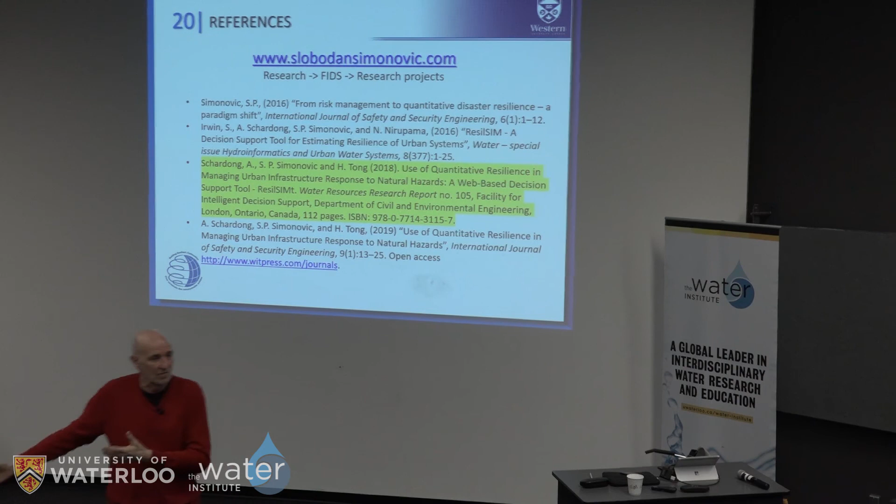How are they called? Toronto—sorry, lost it—the electricity supply, not Ontario Power Gen, not OPG, but Toronto Hydro. They provided us with detailed maps of all the transformers, all the transmission lines connecting them, all the physical and technical information. So you see, we have this OpenStreetMap—that's the public information we input, but we combined it with the information provided by Toronto Hydro. Toronto Hydro and TRCA data are both integrated into the database.

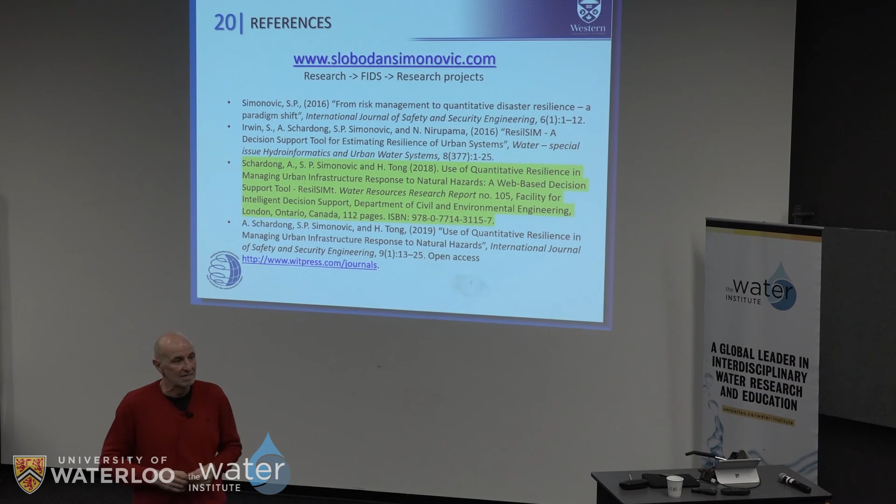For lack of time, this will be the last question.

Sorry, thanks—I'm not sure if I read it right, but earlier in your presentation when you first presented the performance response curves, talking generally about a best case and worst case response back to normal, it looked like you were showing it was possible to come back better than before. Is there an example of what that would be?

Yeah, there are different ways. An example could be infrastructure used for drainage, or dikes. In London, we use dikes throughout the city, and in the case of a flood event that happened, a portion of the dikes were either destroyed or affected by it.

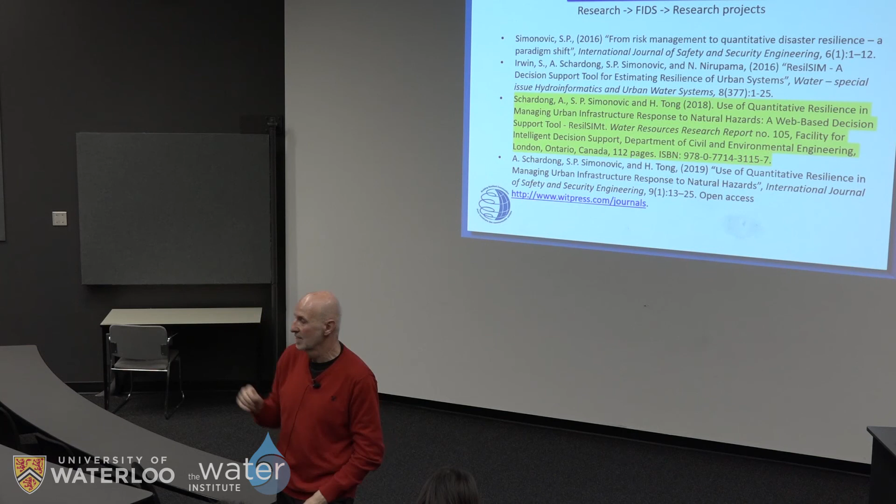So now they're making a decision to rebuild—you can rebuild to the previous level or standard of protection, or go for a higher standard of protection. That will show immediately on our curve, as the system's performance ends up higher than the initial performance level. That's a very simple example.